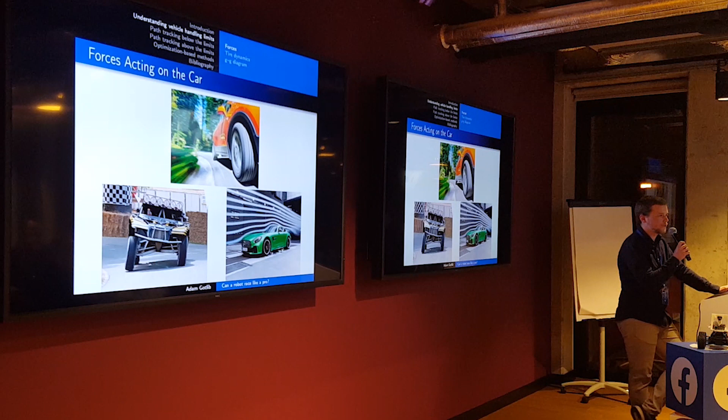And last but not least, there are aerodynamic forces which come into play, especially with high velocities. We have two basic types. One is aerodynamic drag, which makes you slower when you drive. But the other force, which really comes together with it, so you can't choose one or the other, is the downforce. So the faster you get, at least when you consider design of a race car, you are pushed more to the ground, which in turn improves your traction. So this is maybe a bit counterintuitive, but the faster you get, the better you can stick to the road.

Usually when you think about tires, you could think about a simple model where you just have a cylinder rolling on the ground and you have a wheel turned like that and the vehicle will go like that. As it turns out, it's not the case really, mainly because the tires are made of rubber, and rubber is a very elastic material. There are a lot of dynamics that come into play here that you really have to consider if you want to push the vehicle to its limits.

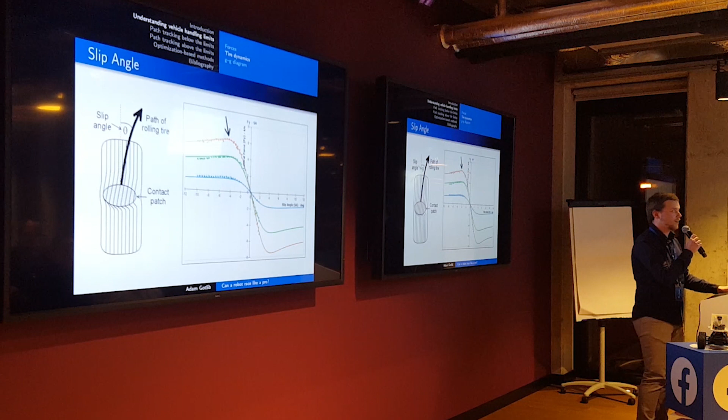So what we see on the left image is how the actual rolling direction of the tire deviates from the normal. You know what I'm trying to say, right? The line that goes along with the tire. I actually have a video too.

So what we see here, we have something that imitates ground that the vehicle would be driving on, and it goes only in one direction, while the wheel is turning left and right. So the rolling direction doesn't change, but heading of the tire changes, and with it the treads of the wheel also deform, so that the tire is able to follow the desired direction. Because it's rubber and because it's elastic material, with this deformation also comes a force that acts in the opposite direction.

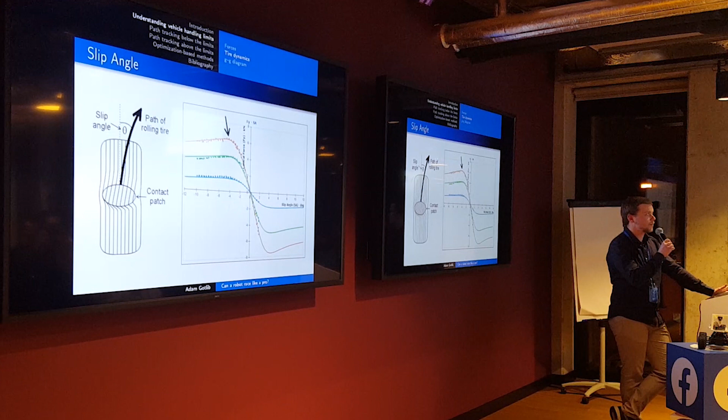So what we see here is an example diagram of how the lateral force that is being generated by tire slip relates to the slip angle of the tire.

As a side note, as I mentioned earlier, during driving, normal load on the wheel can change. And here we have 3 curves in 3 different colors. Each of the curves has different maximum forces. So these obviously relate to the different frictions between the road and the tire. Different load can be one reason for this, but also different road conditions, maybe slippery road. Also, if there's another force that is acting on the wheel, which I will talk about in a moment, it also can reduce the maximum lateral force that you can generate.

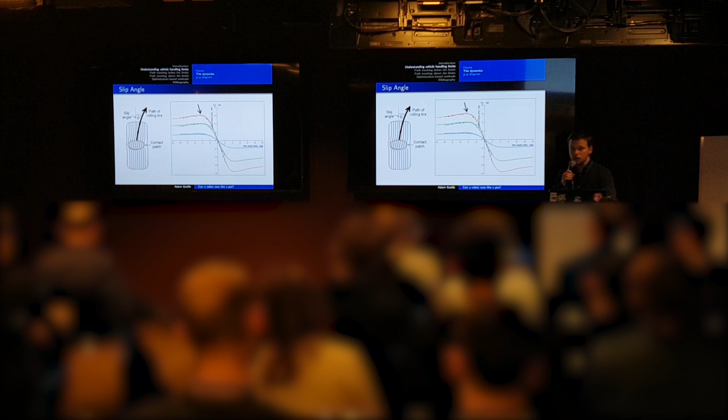So we know about lateral force dynamics. There's also another force that comes into play. This is slip ratio. So basically, how to understand it intuitively, it's the difference between how fast the wheel wants to go, because of how fast it rotates and how big is its radius, and how fast actually the vehicle goes. So this is a conflict between the friction and vehicle inertia. Obviously, if the tire starts rotating faster, then it wants to pull the vehicle forward. If the tire starts to rotate slower because of applied braking, then the vehicle will want to decelerate.

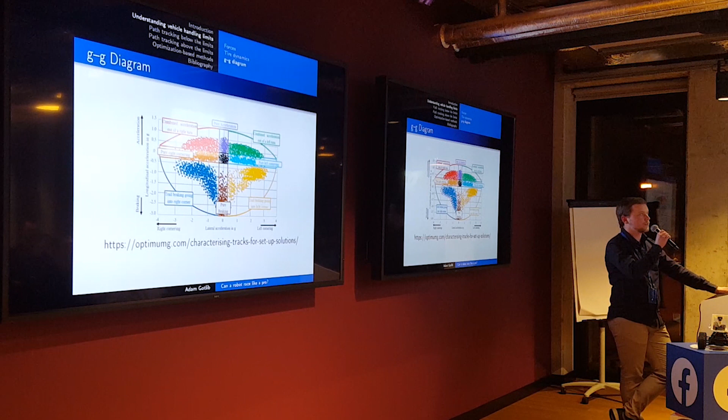And we have transient states, where we brake a little, also turn a little. As you can see, this doesn't have the benefit of either. If you brake a little, you can't turn as much as you would be able to, and if you turn a little, you can't brake or accelerate as much. So this is an important trade-off that you have to take into account every time that you really want to drive at the edge.

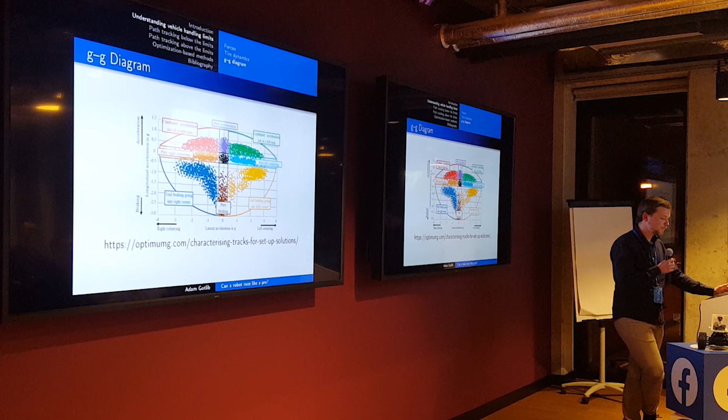So after this bit of introduction about what really has to be considered when designing an autonomous racing control, let's start with some real examples. This is Shelley. It's an autonomous Audi created by the Stanford Dynamic Design Lab. In the words of the creators, this is what the project is all about. It's an autonomous Audi TTS. It's designed to use all the available tire friction, enabling future autonomous vehicles to safely negotiate emergency situations. Researchers are working to improve the car's performance by learning from professional race car drivers. And let me show you how this vehicle operates in practice.

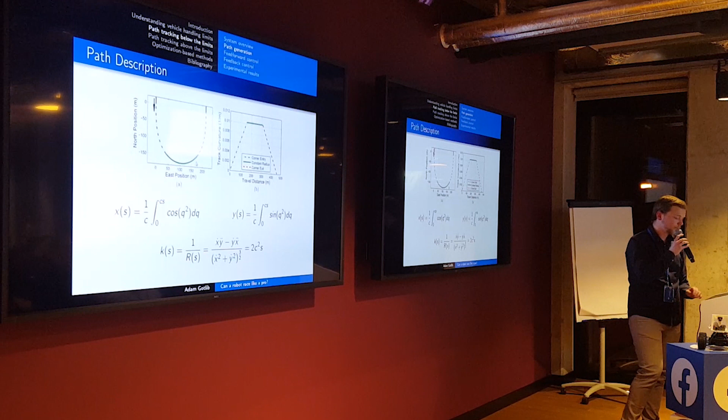Then we can calculate what the lateral acceleration really is. And if you remember from physics, it's just velocity squared divided by radius. But radius we already know because, well, the inverse of radius, so curvature, is 2c²s. When we place it into the first equation, we finally get the formula for the lateral acceleration that we actually can have at any point on the curve, which maybe I'll not say out loud, but yeah, you see how it looks.

Now for the speed profile. How fast can we actually go when we are approaching a curve? First, I think the simplest case, pure cornering. So this is the situation when you have already entered the curve, when you are driving in the middle, and this is the place where we want to have the constant velocity. You know the curvature, and you know radius of the curve, which is r. You know your maximum acceleration, and you also know that the longitudinal acceleration you want to be 0. So from that you can easily have the desired velocity, which is the maximum velocity that you will be able to drive without losing traction on this curve.

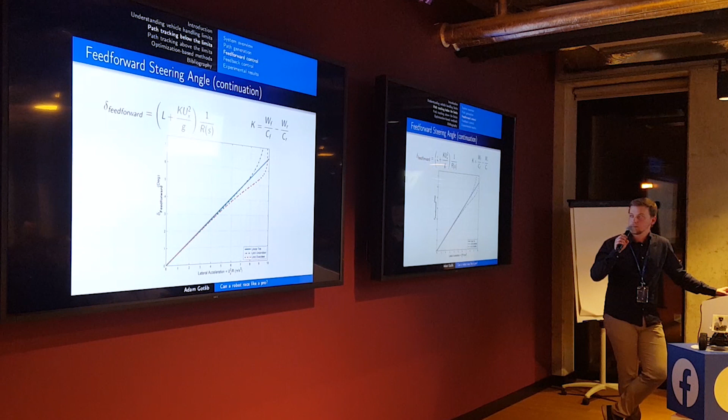This is better shown here on the slide. So the blue line is the relationship between the lateral acceleration that we want to have and the feed-forward steering angle that has been deduced from that. And on green and red, you can see the limits, the actual limits of the vehicle. So with the biggest lateral accelerations, you can actually see that you go below the oversteer limit. So this is something that has to be taken care of if we want to have a stable vehicle.

So having that, just to recap, we have velocity profile. When we differentiate that, we can also have longitudinal accelerations, so we know how fast we want to go and how fast we want to accelerate. We also know how much we want to turn the steering wheel. Now we can go to the feedback part. So first part of the feedback is deviation of the track.

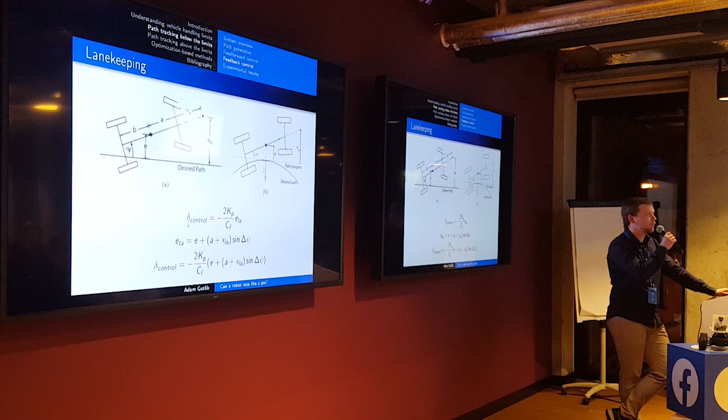In a non-ideal world, so in any world, basically, you won't be able to follow the path exactly. You will always be a bit off, which in here is denoted by the error, the lateral error E. We also use some look ahead, so we don't only look at how far is the center of gravity of the vehicle. We actually look a bit forward to a point called XLA. And this deviation from the path at this point in front of the vehicle is used as a gain to a feedback control. So you generate a control input that is proportional to how far away are you from the goal.

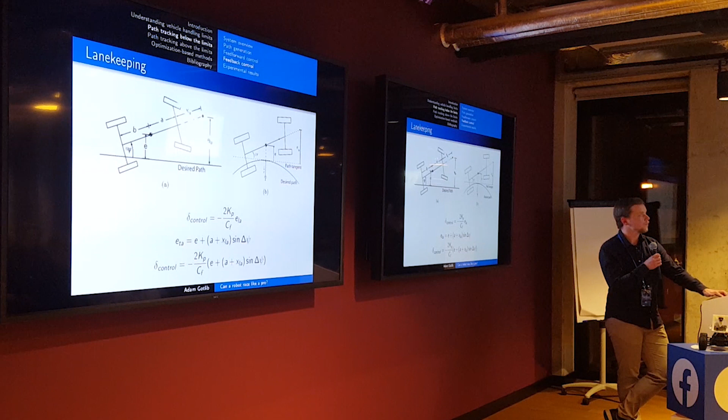Second part of feedback is related with yaw damping. This is related to yaw oscillations. Have any of you worked with proportional controllers, maybe?

Okay, so what we saw before was a proportional controller, and what it does, it creates steering based on how far we are from the goal. But it means that if we start far away from the goal, the combined steering might eventually become so large that we go not really in parallel to the road, but cross it at a very high angle, which means that instead of following the curve as you would want to, we overshoot it in one direction, then the feedback starts working in another direction, and you basically go like that. This is undesirable.

Well, there's a main reason why it's not desirable. It can show in different forms. Just remember that when you start turning, you have less available friction. So one less extreme case is that when you oscillate, you can't accelerate or decelerate as fast as you could. But the more extreme scenario is that you actually start having so much oscillations that you eventually lose grip.

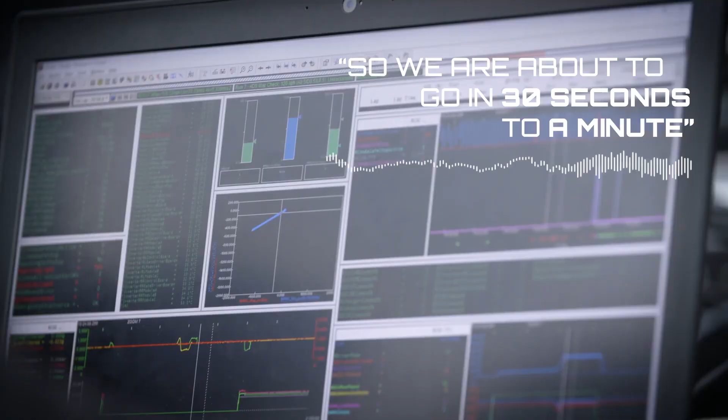So this is another thing that I would like to show you how it happened in practice. So this is a video of Robocar. This is an autonomous car that at the moment holds a Guinness record for the fastest autonomous car. I won't show you the entire video. I just want to show you a small bit of it about the problems that you can have when you really want to push the vehicle to its limits. So this will be from the early tests in 2018.

So just driving straight, but notice in a moment you will change view. There are little oscillations, not really much, but a moment later you lose grip entirely and it's done, basically. So I think that you saw that the oscillations weren't really that big, but even that was enough for the car to lose control. That's why it's important to actually be able to control the oscillations of the vehicle.

So how do you do that? You look at how fast the heading of the car changes, and you add feedback proportional to that. So it's called a derivative controller, which means that the value of the control is proportional to how fast the value changes.

Having these three values, the feed-forward steering angle, which we developed just from equations, the control feedback, which is related to how far we are from the track, and the damping feedback, which is related to reducing oscillations, gives us the combined steering angle that we use to actually control the vehicle and turn the steering wheel. So this is one part of the inputs. The other one is longitudinal, so how fast we actually want to accelerate.

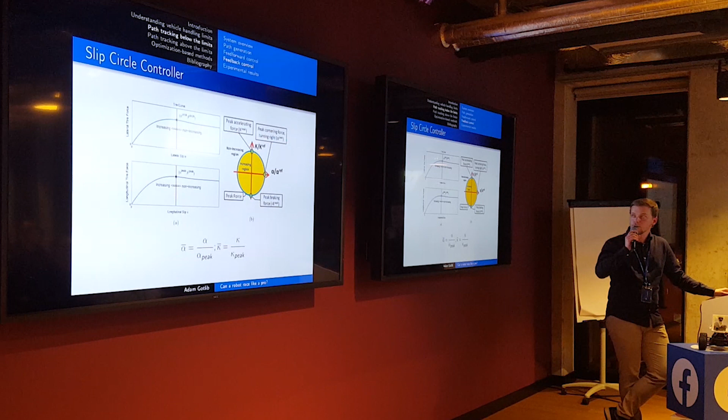These curves might be somewhat familiar if you try to remember. This is actually half of the curve that I've shown on the previous slide. It's also inverted because it's only talking about absolute values, so it doesn't care if it's inverted or not. The curve on the top shows available lateral force relative to the slip that appears on the wheel. And below we have a similar curve for the longitudinal slip, which is related to the tire slip ratio.

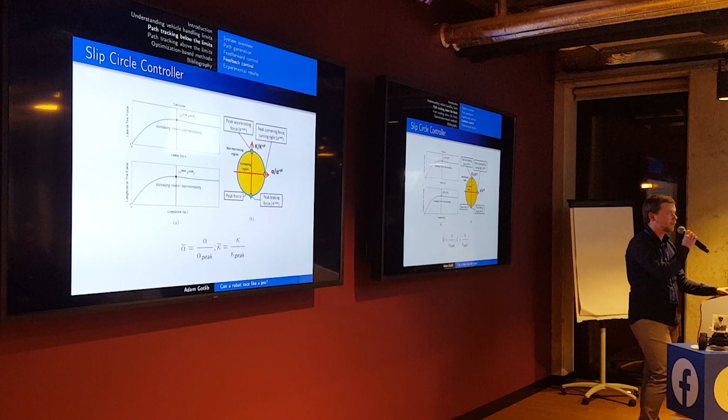In practice, it is useful to think about these two as relating in something similar to the acceleration diagram that you saw before, which is shown here. So how you can think about it is that if the tire causes the vehicle to accelerate a lot, it can't at the same time cause it to turn a lot. So this is a similar case to what we had with the general view. Just this time we're looking at individual tires. And at the bottom we have, just for utility, a simple normalization so that we have a unit circle. So alpha with a dash above will be alpha divided by the maximum value, and similar with kappa.

So based on that knowledge, a slip circle controller can be developed. So it looks at which point we are in the circle, or usually how far we are away from the circle, and based on that it sees how much available longitudinal force it has, which can be increased or decreased depending on what the actual situation is. So this part of the controller just deals with the friction limits and how not to exceed them, but on the other hand, how to be as close as possible.

Also, we have a feedback that is related to the speed that we wanted to have. It might happen that we are on the path where we want it to be, but our speed is different. So what we can do is just add a little bit of throttle, or if it's an opposite situation, a little bit of braking, to compensate and be as close to the desired state as possible.

So these three components of force, which is feed-forward force that has been generated from acceleration, feedback, and speed, which we have seen just before, and only last bit, which is related to aerodynamic drag. So this is basically a compensation. You apply some force for the vehicle to go forward, but you also have some force dragging you in the opposite direction, which is usually the air. You just see how much force that is and apply additional force to go faster. That's the basic concept.

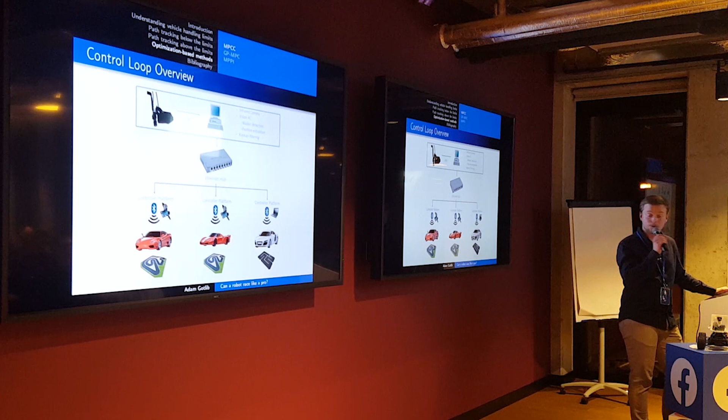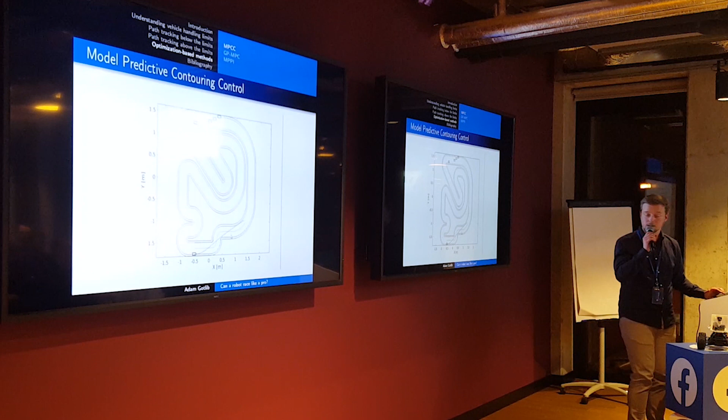So you have information about your position, you have information about this path that you want to follow. So the goal really is to go as fast along this path as possible while staying within the limits that are depicted by the green dots. Go as far as you can without hitting the walls. And based on that, it's able to actually generate really good trajectories. As you can see, when entering a chicane, which is just a set of 2 turns in opposite directions, it knows to drive straight into them, so it doesn't have to lose velocity to do one or the second turn.

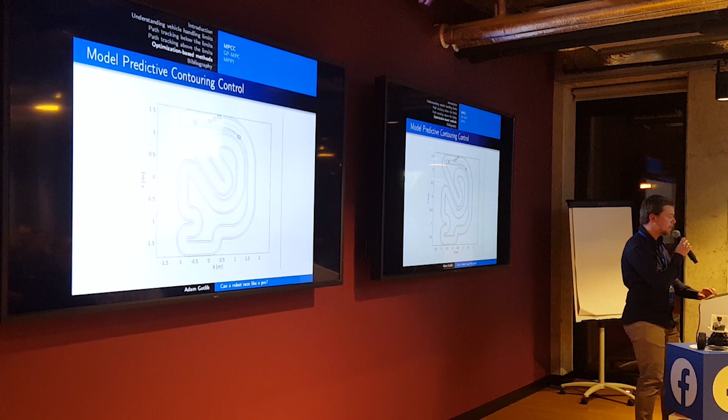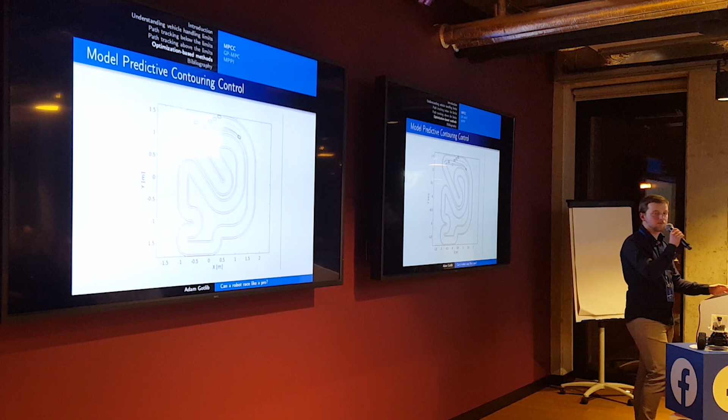And also here is shown how the obstacle avoidance is done. So when we had the track boundaries that we saw before in green, here these boundaries are modified based on where the obstacles are in the path. So the left border is still where it was, but because on the right there are obstacles, now the road boundary approaches closer and closer to the corridor, until at the end you really have only this very narrow part of the path that you can go through.

This algorithm was used by a Formula Student team, AMZ Driverless. It's from the same university also. So Formula Student is a competition for teams that revolves around creating their own racing cars according to very strict specifications. And one of the categories for Formula Student is a driverless competition. I'm not sure when it started. It's pretty young, but nevertheless, the team that you see here, AMZ Driverless, I know that it's won at least since 2017. I don't know about before, but they're really good at what they do, and they are far above their competitors.

Maybe this last year, actually, there was one team that came pretty close from Germany, but when you summed up the points, they had 800 something, the second team had 800 something points, and the third team had 400 points. So you can see the gap is pretty wide. I don't really know how the points are calculated. I tried to understand it, but it's not really that important. What's more important here is the distance in points between the cars.

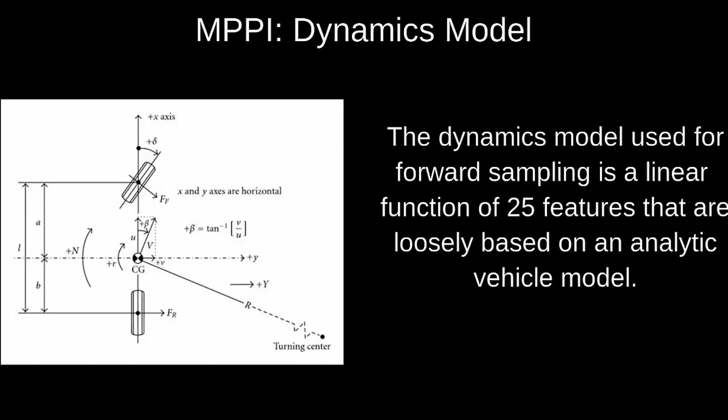Unlike most traditional optimal control methods, there's no need to backpropagate information during the optimization. Also, sampling trajectories is a naturally parallel task which can run in real time on a GPU. The dynamics model used for forward sampling is a linear function of 25 features. The nominal trajectory is shown in green, and the sample trajectories are shown.

So these are the 2,560 trajectories. One time step of controls is applied, then optimization is repeated. This process runs at 60 Hz on board the robot. The trajectories are shown on the left as they're sampled in real time.

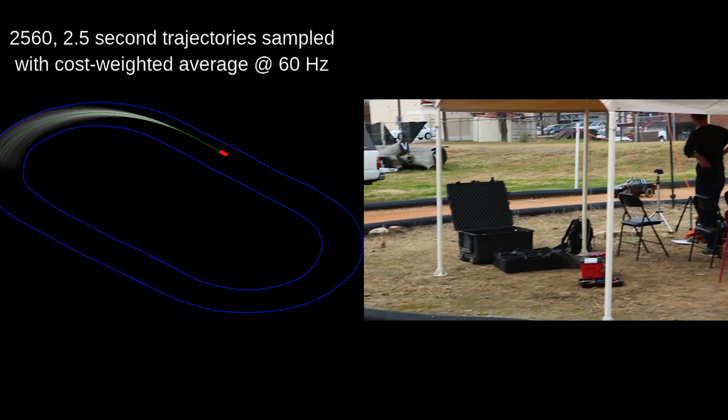Yeah, so in white there are the multiple trajectories that are generated. Each of these is evaluated, and not the best one, as he said, but an average of a few best ones is generated as the green one, and the vehicle is able to drive on a road which is not very easy for an automatic controller, because how much grip you have can change really quickly.